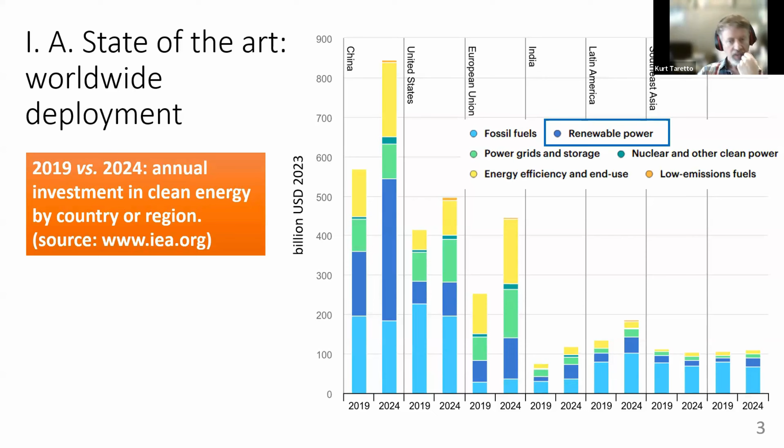So to begin with, this is the outline of my talk. First, I will talk about the deployment of solar energy, the state of the art in the world, and particularly in Argentina, where I will show you also, very briefly, the regulatory framework that led Argentina to slowly grow in photovoltaics technology, and then try to identify a couple of barriers I elaborated with a couple of colleagues quite recently. Barriers to further development, I mean.

In the second part of my talk, I will talk about recycling, the recycling of traditional modules. More than 95% of photovoltaic modules are called traditional because it's the silicon technology, and this is what I will be talking about: what is the state of the art worldwide about recycling, how can we forecast the demand for recycling modules, and how can we apply this forecasting model to Argentina. Finally, I will give a technology overview about recycling possibilities.

So, yeah, let's start.

The solar deployment around the world - I'm sure you have seen enough graphics about the growth of renewable energy along the years. This is a different way to look at it: a comparison between the year 2019 and 2024 of the investments done on renewable energy. Renewable power is marked here in blue. These are the different countries or regions, and you see that between 5 years ago and now, more or less all of them increased notably the investment in renewable energy, of course including solar. But is this enough?

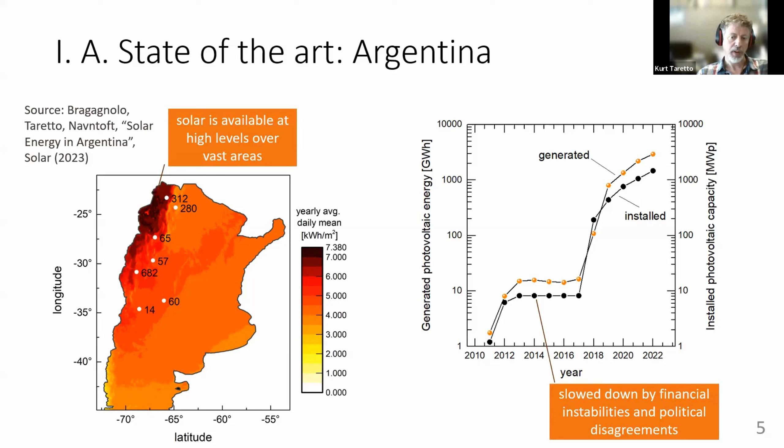Well, Argentina is a very sunny country, I guess you know that. This is a map of solar energy - the yearly mean value of solar energy per square meter. You can see we have regions with very high solar energy. In particular, this point here is the point in the world with the highest solar energy along a year. You may think about the Sahara, but the Sahara is not as high as this, where you have 4,000 meters above sea level.

For comparison, the solar energy levels are, for example, in southern Germany, which is sunnier than the north, around 3 and 4. So Germany is below the half part of the scale. But we have a lot of solar energy. Of course, the first installations of solar plants are done in these areas where you have the highest radiation levels.

But this is very recent - the installations began in 2010. Here on the right we have the installed photovoltaic capacity in megawatt peak. We just surpassed 1 gigawatt peak. The generation goes hand in hand with what you install, of course. But you see that this is a very particular development curve, right? So we have a lot of solar energy available over very vast areas, but we have issues that made us slow down the installation.

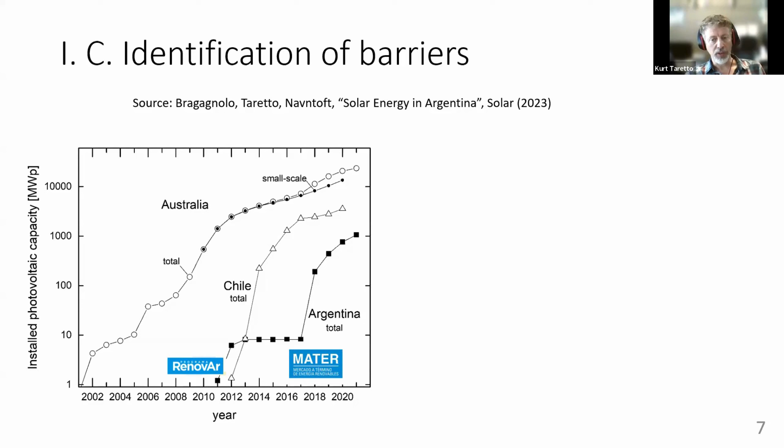Let me give a brief introduction about the regulatory framework which constrains this evolution. There are public policies in Argentina - regulation laws and promotion programs which have different targets. For example, this is a program to facilitate renewable energy to rural areas. This is a program to facilitate the proliferation of renewables for large users like industries, or this other program promoted the installation of larger solar plants, for example via tax reductions or custom duties reductions.

In this recent publication, we tried to figure out what was going on with Argentina and compared it with Australia and Chile. They have similarities - similar solar resources, these three countries. Australia has a higher per capita income than Chile and Argentina. And nevertheless, Chile reached the gigawatt peak capacity a couple of years after Australia, like 5 years. And we took another 5 years to reach the levels of Chile.

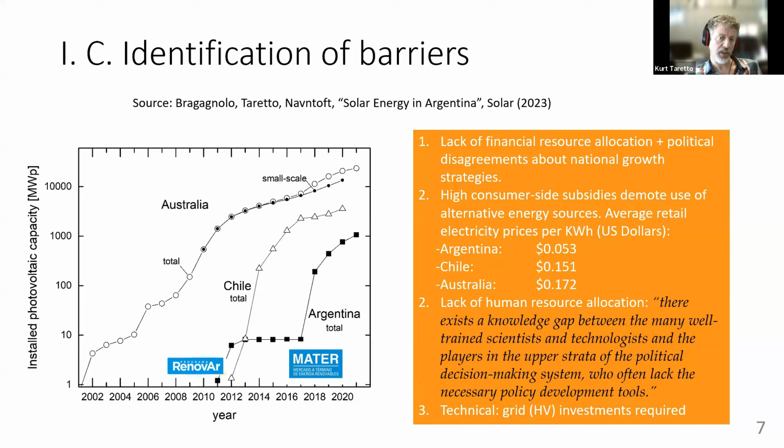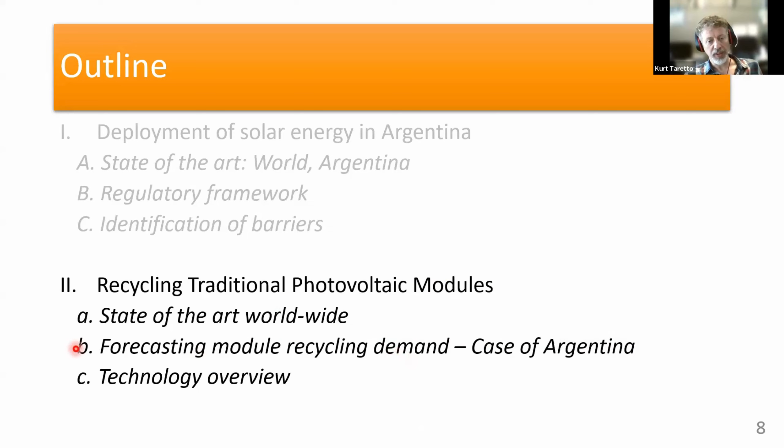So we had different slowdowns. The part where we have seen an increase in solar energy installation had to do with these programs I mentioned here and here, but different barriers slow down the installation in different opportunities. For example, we identified here the lack of the allocation of these financial resources. Also political disagreements between different political contenders, high consumer side subsidies, which demote the use of other energy sources, also in particular renewable.

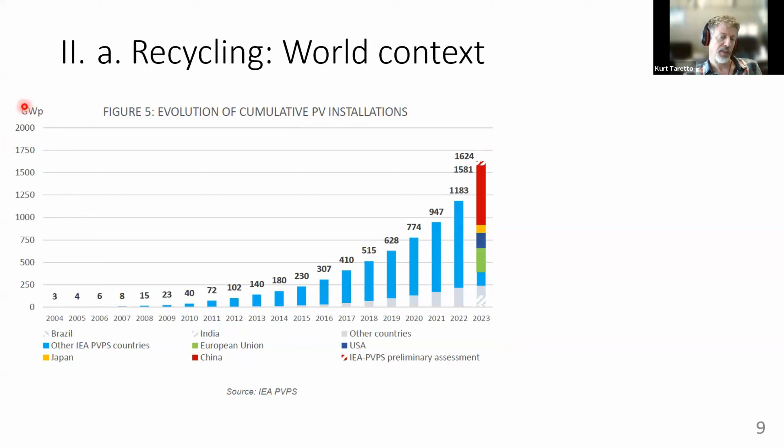And this can be seen, for example, if you take the average retail electricity prices per kilowatt hour in terms of dollars here, Argentina is about 1/3. If you look at the numbers, 1/3 compared to Chile and Australia. Also, as we stated in this paper, I just quote this, there exists a knowledge gap between the many well-trained scientists and technologists and the player in the upper strata of the political decision-making system, who often lack the necessary policy development tools.

And finally, we also have a technical barrier, which is we require investments in the high voltage grid in order to drive all this renewable energy located at different parts of the country towards the bigger centers of consumption. But anyway, with all these installations, we see that the numbers are growing not only here, but also in several different countries. And this raises the question about recycling, of course.

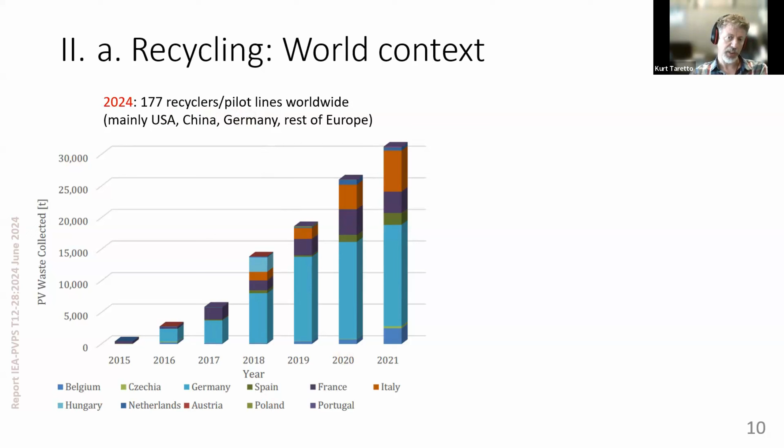So let me give you first a state of the art around the world, what is being done with recycling. First, let us just estimate how much there is to recycle out there. This is a graph which you must have seen in different ways. This is the time in years and the cumulative installation of photovoltaics, but there are similar graphs, for example, for wind energy. So for photovoltaics, this is 2023. It's expected by the end of this year to reach the 2 terawatt mark.

So how much is that in terms of recycling? If we have 2 terawatt of modules, which are just now starting to fail massively, because the timescale here is up to 2024, we have 20 years since photovoltaics installation has become massive. So just now we have a very large volume of modules to be recycled. So we can say for 2 terawatts, if each module is 500 watts, we have 4 billion modules to be recycled. So if the lifetime is 30 years, this means a mean amount per year to recycle of 3.3 million tons per year of panels, right?

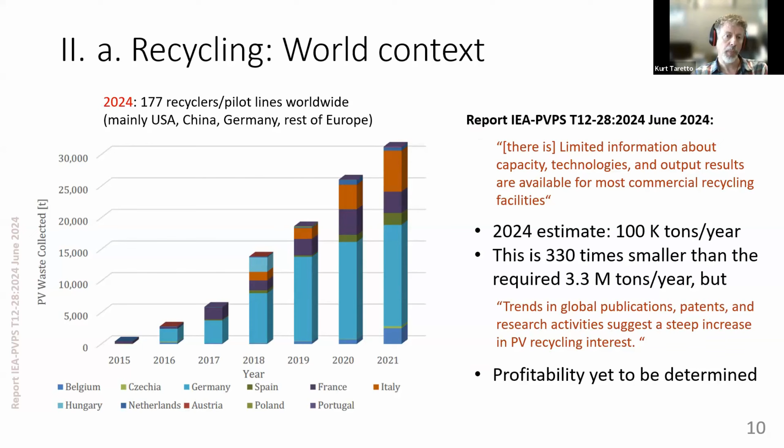Is this a lot? Is this not a lot? We can compare it, for example, with the plastic waste. Plastic waste worldwide is 220 million tons per year. Okay, so this is a figure to bear in mind. Is there any significant recycling around the world? We need 3.3 million tons a year.

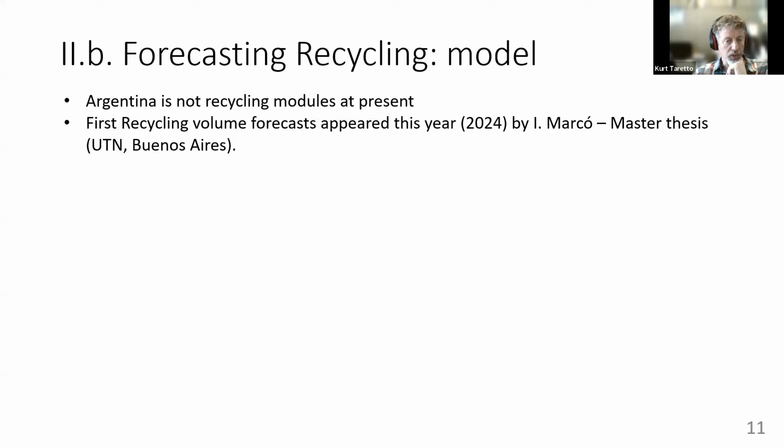Well, this is the evolution of just the amount of PV waste, photovoltaics waste collected in tons. So we have several companies now. In 2024, there are 177 recyclers or pilot lines. And in total, in 2021, this was 30,000 tons of collected material. Perhaps it's 100,000 tons, much less than what we need. We need this 3.3 million tons.

In this report by the International Energy Agency, they say that although they have this, there is limited information about what is the real capacity of all these plants to process PV waste. Also, what is the output? So it's not clear which of these projects are profitable, for example. So it's unclear how much and how efficiently the recycling is going on. It's very recent.

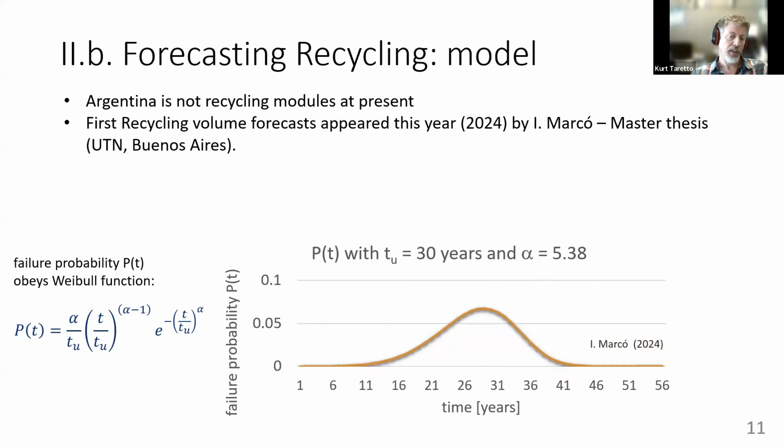Nevertheless, they say that if you see the trends in global publications, patents about recycling and research activities, this will still be growing for several years. The profitability of these projects is not known. It's yet to be determined, and it will depend on several factors, countries, techniques, not clear as of now, according to this report. Which, by the way, if you're interested in this topic, I recommend you to look for it. It's free to download.

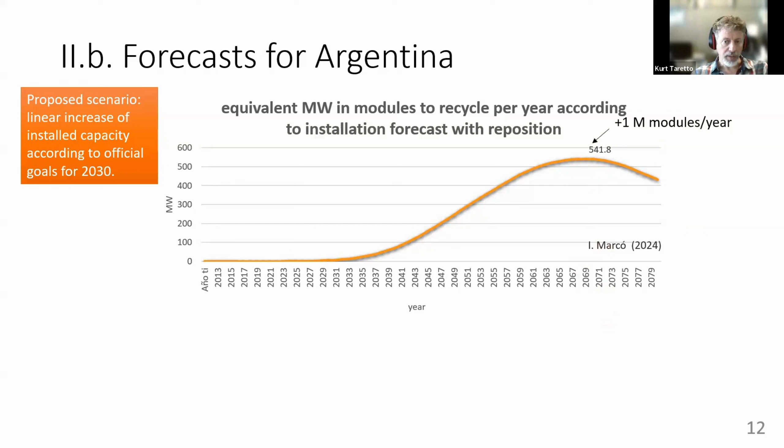Let us try a very brief look at how you model the forecast for the recycling demand, in general, but also in Argentina. This student of mine made her master thesis about recycling modules in Argentina, and Argentina is not recycling modules as of now. So how do you do this? Well, there is this Weibull function which gives you the failure probability. This function is well known in many technology aspects. For example, industry parts or devices tend to fail according to this distribution.

For example, if 30 years is the lifetime, well, this is the probability function for a 30-year projected lifetime of a module. And the spread of this bell-shaped curve has a geometric factor, which was determined empirically by different studies. So this is a number which gives you how much the function is spread. So you can see that although the lifetime is 30 years, maybe at year 10 you have a couple of failures, right?

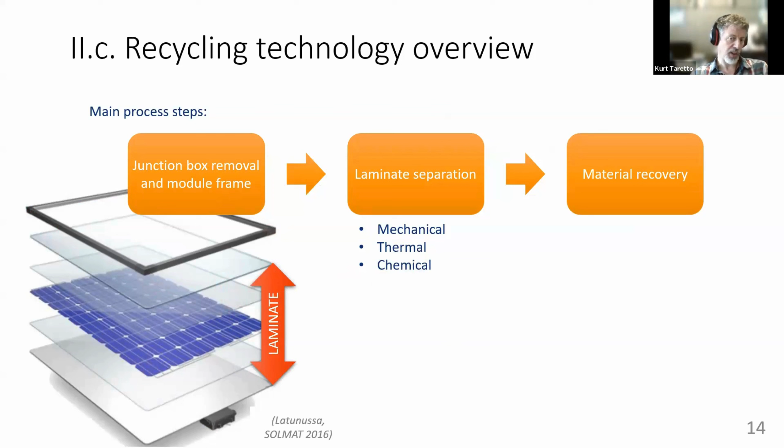And if you fold this probability with the amount of installation for a given country, for example Argentina, you will have a curve that shows you how much you have to recycle every year. So this is what Ines calculated. For the forecasts of installations in Argentina, you get a forecast for recycling with a peak in the year 70 of the equivalent of 500 megawatts in modules. This implies, for example, 25,000 tons of material to be recycled. Also, you can repair modules. This is not taken into account here.

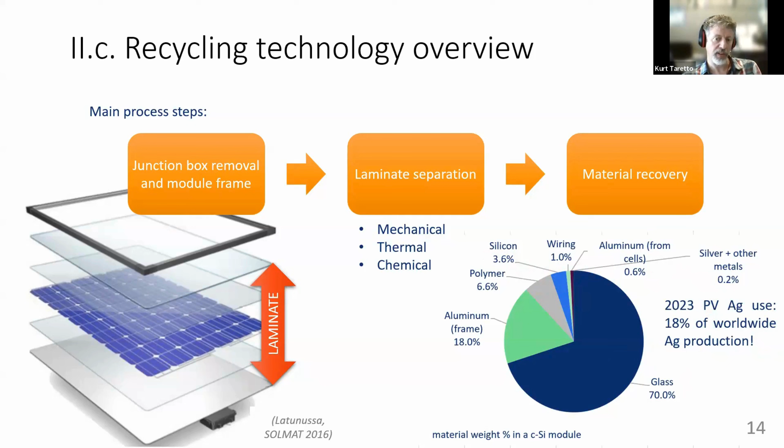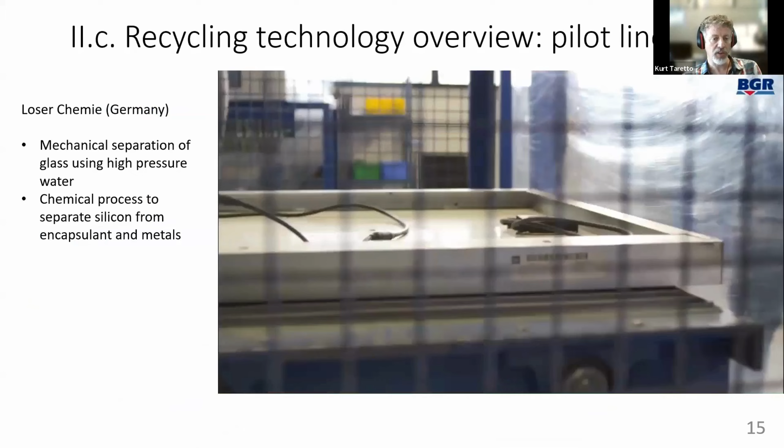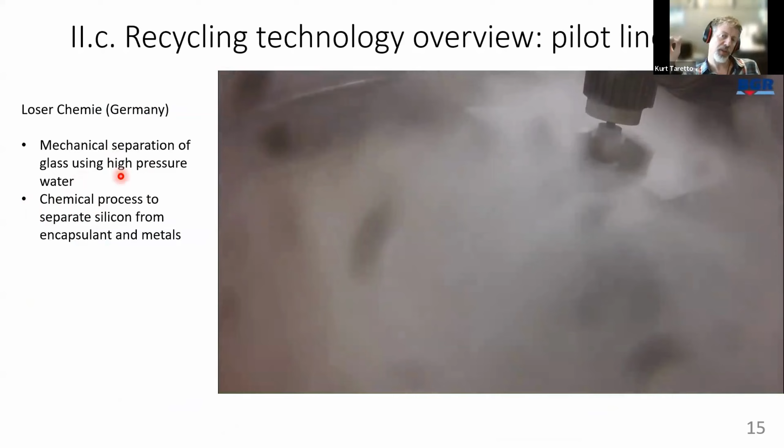A very brief overview before reaching the end of my talk: what is there to recycle in a solar panel? It's a really simple device, actually. You have solar cells made of silicon. There are soldering strips, metals like copper, tin, lead for the soldering. The cells are glued together with some polymers to the glass, which is in the front. And we have an aluminum frame and a junction box, which is plastic, in the back.

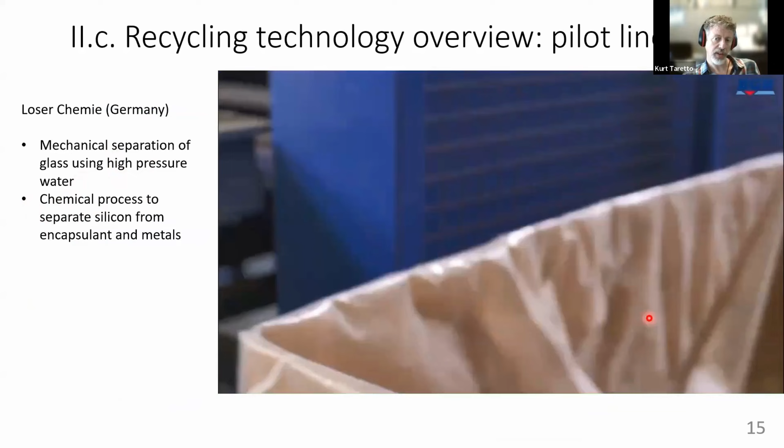So the process steps for recycling are first to remove the frame and the junction box, and then you have what we call the laminate, which is all these sheets glued together with the cells. And there are a number of ways to separate them: mechanical, thermal, where you put everything in an oven, or chemical, of course. And then you can start thinking about recovering the material.

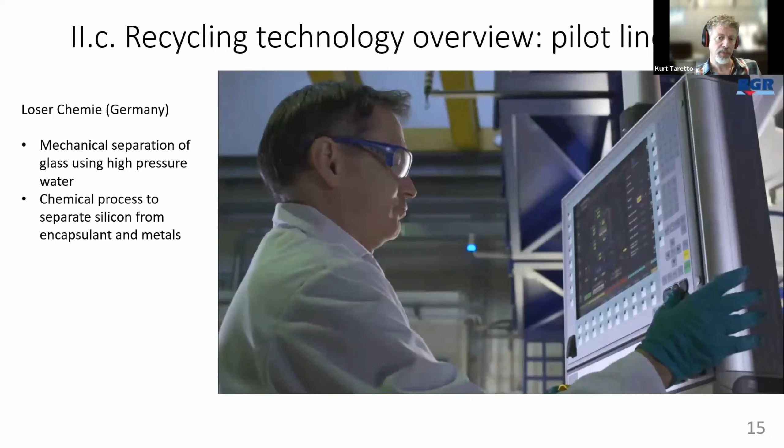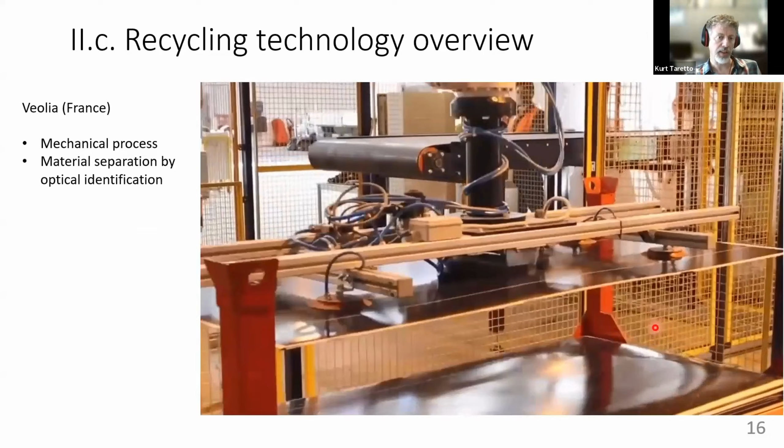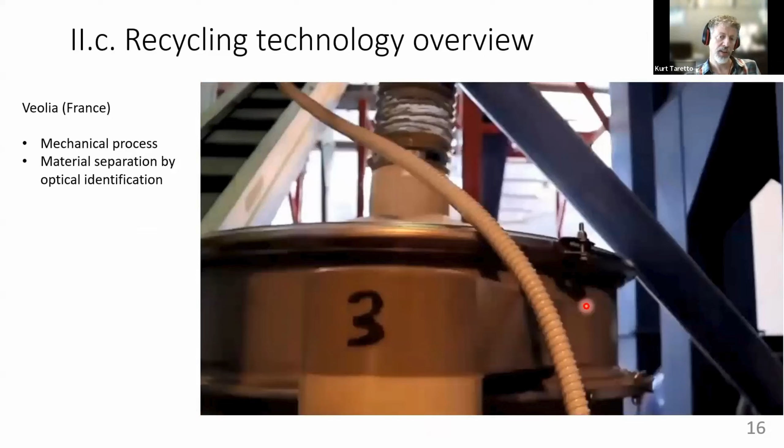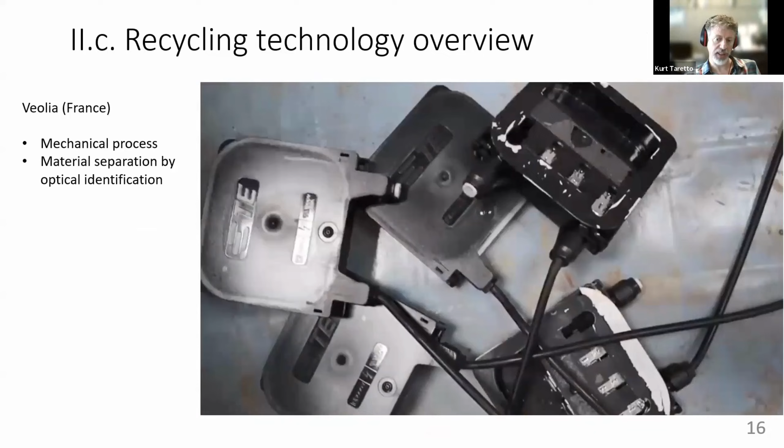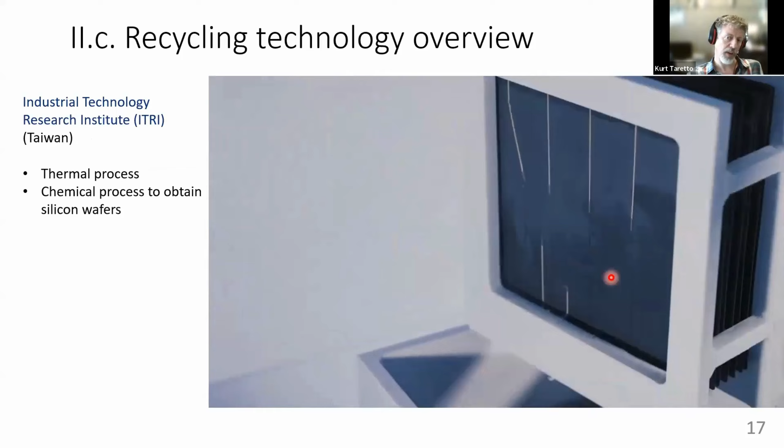These are some examples of recycling facilities. This is in Germany, Loser Chemie. They mechanically separate the glass using high pressure water. So this is a mechanical process; they separate the laminate from the glass, and they get perfect sheets of glass to be reused. That's the glass sheet, now without the cells and everything. On the other hand, they have a mix of the silicon and the plastics, which they then separate chemically. They put everything in a big recipient and separate the different materials using different processes.

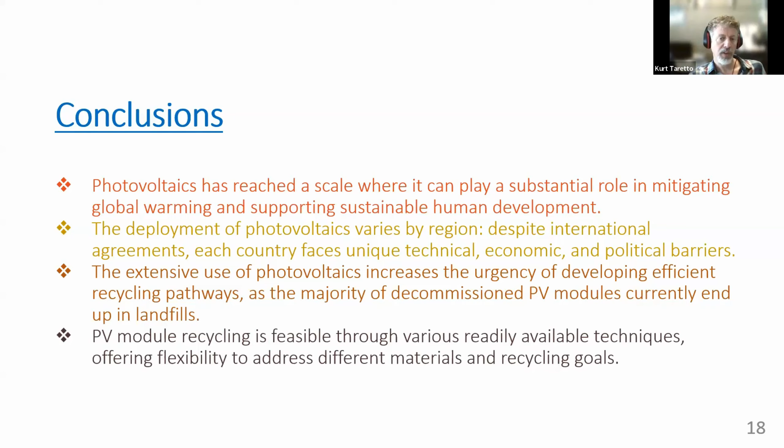Also, this is another company in France. Let me go back a little bit. They separate the frame, the junction boxes, which are plastics to be recovered, and then the glass and the silicon. It's not shown very clearly, but they crush the panels, and then crush them again into a smaller scale until you can separate by different mechanical methods. You can separate the silicon from the plastics and the glass. So here they get almost pure glass and silicon on the other side.

Finally, this is another approach applied in Taiwan, which is to put the modules in an oven and then separate the cells individually, very neat. They can apply different chemical processes and obtain the silicon wafers, which they can reuse to make new panels. And this is actually working, as they claim. This was a very brief overview of the variety you have in recycling solar panels.

So these are my conclusions to this brief talk. We noticed that photovoltaics has reached a large scale. It can play a substantial role in mitigating global warming and supporting sustainable human development. Now, the deployment of photovoltaics depends on the region or country. Despite international agreements like Paris, each country faces unique technical, economic, and political barriers. I showed you a couple of these for Argentina.

The extensive use of photovoltaics increases the urgency of developing efficient recycling pathways, because the majority of decommissioned modules go right now into landfills, okay? And finally, the good news is that module recycling is feasible through a variety of techniques which we already know. So there is some flexibility for different pathways according to different recycling goals.

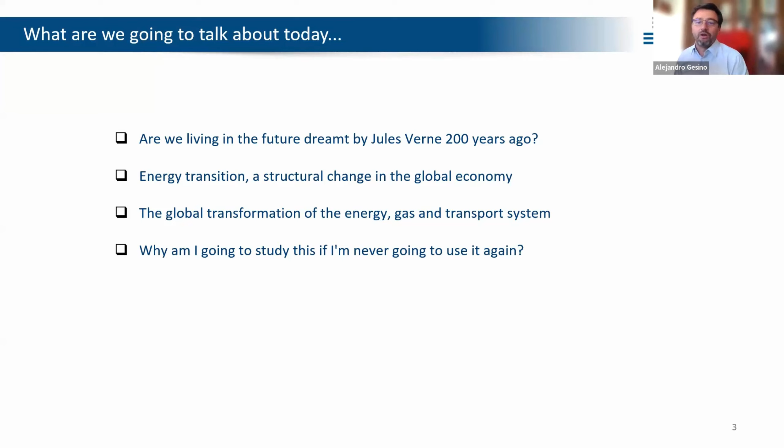We are talking about sustainable human development, and we are not talking about the consumption of products which are being extinguished due to human action. We are now saying that if we consume what we already know we have, human life will change radically as we know it.

Let me say why we are talking about this today. Let me ask you a few questions. First of all, are we living in a future which has been dreamed by Jules Verne 200 years ago? The energy transition requires structural changes in the global economy. And finally, the global transformation is not only energy. When we talk about energy transition, we are talking about three streams of work: energy, gas, and transport. And we will go through this during this presentation.

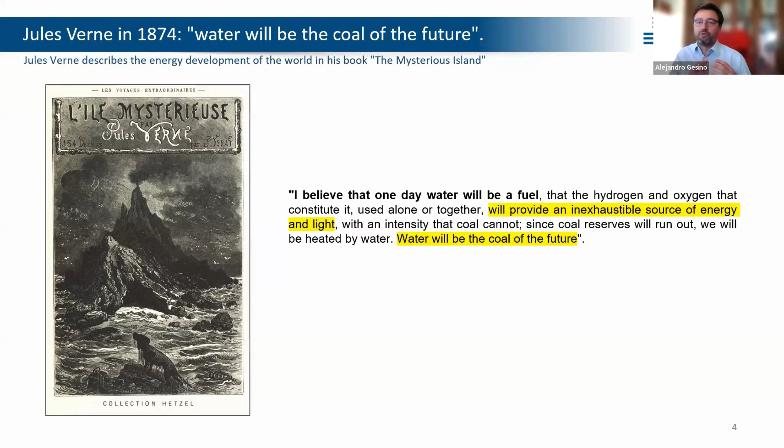And some questions for the students. A question we asked ourselves many times, 20, 30, 40 years ago: why am I going to study this subject if I am not going to use it anymore? So people loving books said, I don't want math. People loving math said, I don't need to read a story and make a summary for my teacher.

Let me go through this at the end of this presentation, saying, guys, everything is linked to everything. And in this university environment, it's very important to answer this question always in the same way. 30 years after we asked this question, we are saying, guys, I am working and need to study chemistry, because now I am talking about electrons and now molecules are going to be mixed within the business cases.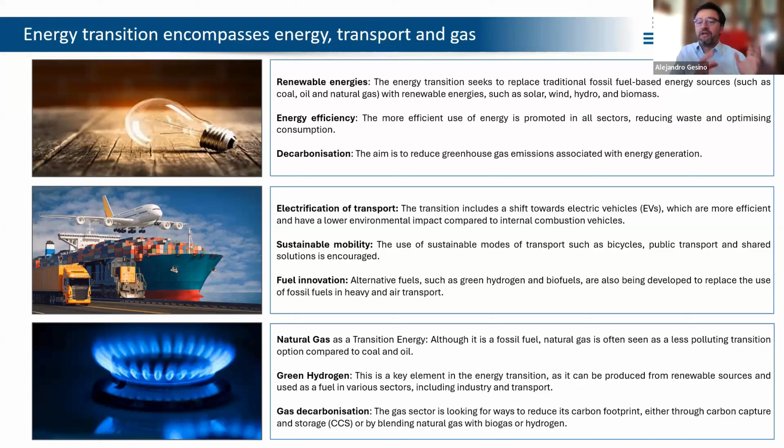Let me start from the end. A well-known author of many books and stories already predicted what we are living. He said: I believe that one day water will be the fuel, that the hydrogen and oxygen that constitute it, used alone or together, will provide a source of energy and light. This was said in a book in 1874. The book was The Mysterious Island, and it has been downloaded many times since we started bringing back Jules Verne's ideas, saying that we will use water as a fuel.

Please remember when he said this. When the trains in the industrial transformation were running on coal, in no way could it be said that water was a fuel by people who at that moment were living because of carbon. I will come back later on, but now we are living things which were said 200 years ago.

The energy transition goes through energy, transport, and gas. I will not go through this in detail because I am sure you have enough knowledge, but it's a reminder.

We are used to knowing that wind turbines, PV panels, like Mr. Taretto mentioned in his presentation. Thanks also, Kurt, for this. I was learning many things from you too. Glad to know you are there. You have many things which were introduced to us by many teachers I had in Germany, for example, during the more than 12 years I was living there.

There we were talking about energy, but they always said, guys, it's not just energy, it's energy, transport, and gas. Wind turbines, PV panels, biomass, hydropower, this is energy. But guys, do not forget, transport and gas are part of the equation. Back to the wind turbines, Hanover Messe, Hamburg Messe, Husum, and so on in Europe. Always our teachers saying, guys, do not forget, transport, gas, and energy. It's not energy only, and now we are living this.

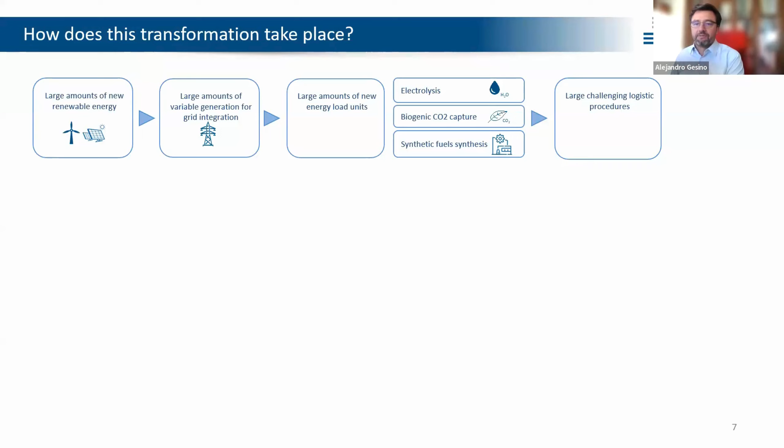synthetic creation of the same molecule. Before I go further, the molecule is the same - please do not think we are talking about a different molecule. We have been talking about electrons and cables, but now we are talking about those electrons powering units which are producing molecules. But the molecule is not changing. Chemistry is not changing. Physics is not changing. We are just using them now.

The other good news is that we are using proven technology. We are not asking ourselves if we can electrolyze water - it's proven, it's there. But now we are bringing this to a new level, to a next generation.

What are we talking about? Please follow this very basic scheme from left to right on your screens. We are talking about large amounts of new renewable energy - please take care of the word 'new'. It's not already installed power. We are talking about thousands of gigawatts which are going to be installed, and are already being installed, to power this chain.

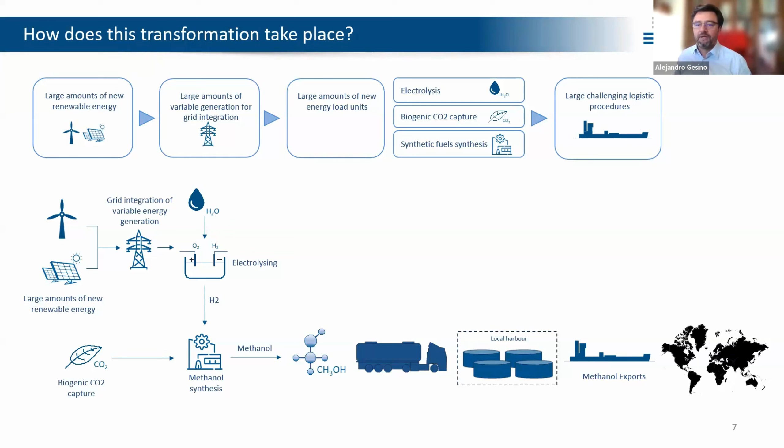Then we need to handle large amounts of new renewable energy in the grids. We have a huge task of grid integration. And now new actors, new friends in our constellation, in this universe - again, I will repeat it until I finish this presentation: energy, transport, and gas, not only energy. And now we have actors which are loading the system.

Electrolyzers, the biogenic carbon capture units, and the synthetic fuels synthesis system for ammonia, for methanol, for whatever. These are large units which are going to be new in the system.

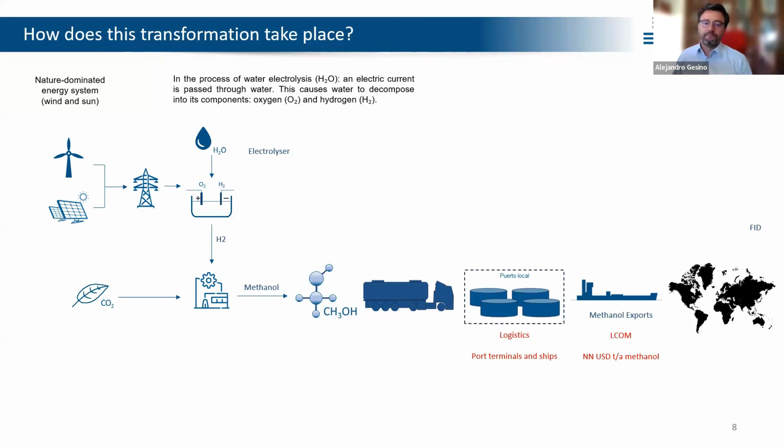And finally, the challenge of logistics, bringing everything to the consumption places. But how is this distributed? If you see it again, left to right: you generate energy, bring those large volumes of energy to the grids, which power the electrolyzers, which power methanol units. In this case, I am using the example of green methanol, where I am also powering the carbon capture, the capture of biogenic carbon, and then producing methanol, transporting it to the local harbor, and then bringing it to the world.

From places where I have unique resources of wind and PV combined, from places where I have biogenic CO2 - ethanol, or paper, cellulose, for example - and bringing them to the consumption.

Places in the world that are looking forward to green fuels, synthetic fuels, where non-fossil CO2 is being consumed. And this is great good news. I will come back to a bit of geopolitics here.

Let me make it a bit more complex, trying to do it quickly as we do in the university. We go from a nature-dominated energy system - wind and sun dominate the systems. 200 years ago it was said that water is going to power our system. Please remember that. In this process, water electrolysis creates hydrogen on one side, oxygen on the other side, and then we use this hydrogen as a fuel.

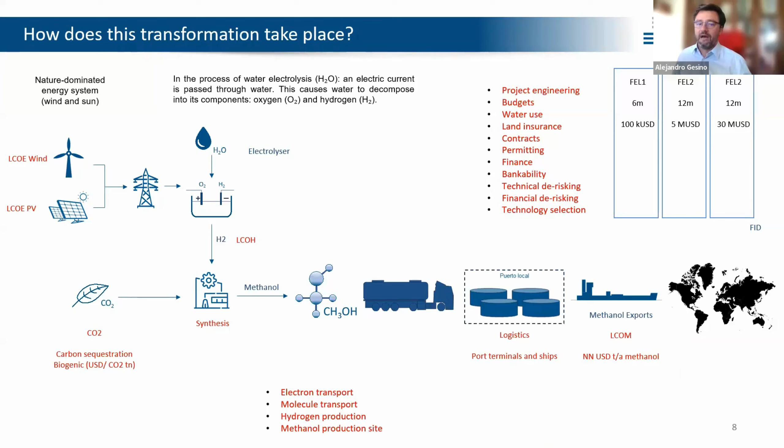Then the synthesis. The typical oil and gas industry we know, creating methanol, creating ammonia, time ago using fossil CO2. But now we need the CO2 to be biogenic, meaning non-fossil CO2, which looks difficult to understand.

And then we have a certain degree of discussions of issues we need to develop, maturing during a certain number of years until we can install these projects. These projects are starting from small-scale projects of 2 to 4 billion euros, up to 20, 40, 45 billion euros. Again, the scale is different.

The engineering behind is different. And we come from a few hundred million euros for a large wind or PV park to billions in a pilot level.

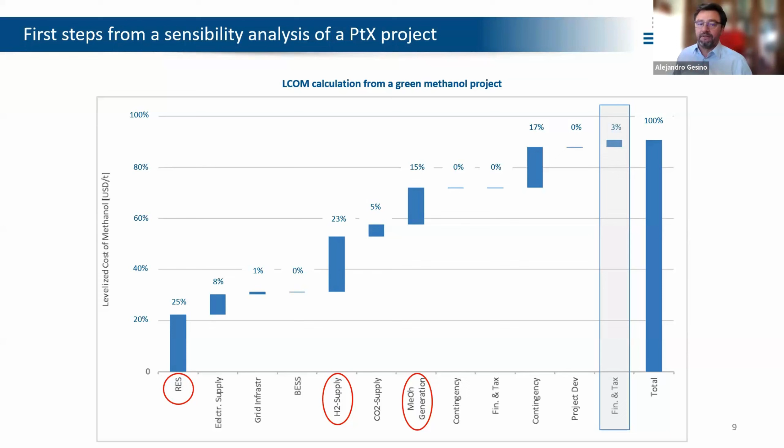And then the discussion here comes about what are we transporting? Again, I will not jump in here because this is a matter for typical lectures for a master's or a PhD, but we are discussing a trade-off between transporting electrons, transporting molecules, transporting hydrogen, transporting methanol until the site of delivery, from the site of delivery, and so on, making the better price, making this affordable, trying to get the levelized cost of methanol.

And compare apples with apples. At the end of the day, I am comparing a ton of methanol. The molecule is the same. The origin is different. The green CO2, the biogenic CO2, is the difference. The green energy, the green hydrogen, is the difference.

And the challenge for us is to make it affordable. And the scale is the discussion. When you have economy of scale, this is affordable. The prices are close to industrial prices nowadays. And then the green industry is taking place nowadays.

Example of what we are doing here when it comes to a project and sensitivity analysis. Again, the final product of this is, and the discussion is, how much it costs. The cost of a ton of methanol.

Can I pay for it? Well, you need to focus on some areas which are more or less relevant in terms of your price. Here you see who is really influencing the cost of methanol when you produce it in the chain I showed before: the renewable energies, the electrolyzer, the synthesis of the green fuel, in this case methanol, and very importantly, the financial costs and taxes, the financial costs of the capital you need to use.

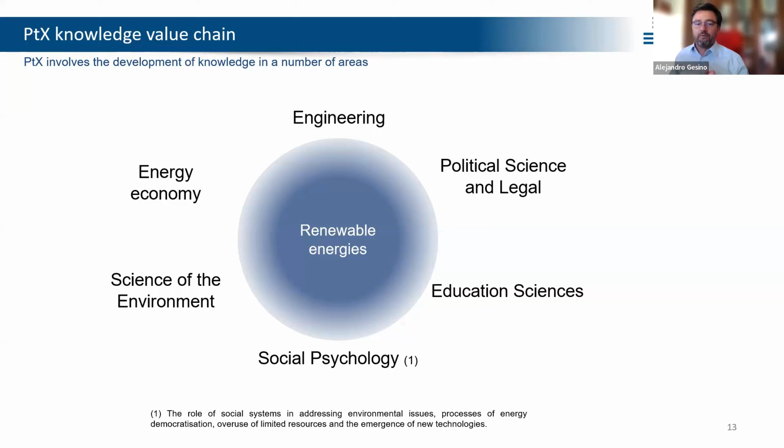Typical areas, South America, the southern part of Africa, are regions believed to be the producers of large amounts of green fuels, synthetic fuels. Exporting to whom? Europe, South Korea, and partially Australia, which has two roles, exporting and also consuming certain kinds of them.

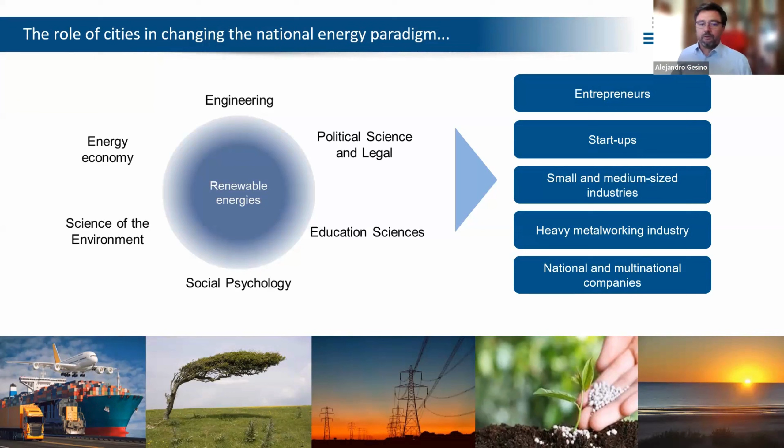It would be hours of discussion if you put on top of this a layer of politics, governments left, center, or right through history. If you look at the development of patents and technology for renewable energy, wind, PV, who are the countries doing that? If you add wars, which are a very sad event we have in the world, these layers would make it much more clear who is triggering the consumption of these technologies and who is delaying them, pushing the world in one direction or the other.

Let me start finishing this with a more university-typical integration of knowledge.

The good news is that engineers are not the only owners of this solution. We engineers are proud of our career, of our title, and we see ourselves as the key part of the world, thinking without us no one could do anything. But guys, welcome to the reality. We have energy economy, political and legal sciences, environmental sciences, social psychology, and education sciences involved. Without all of these actors, there's no way to create the knowledge we need.

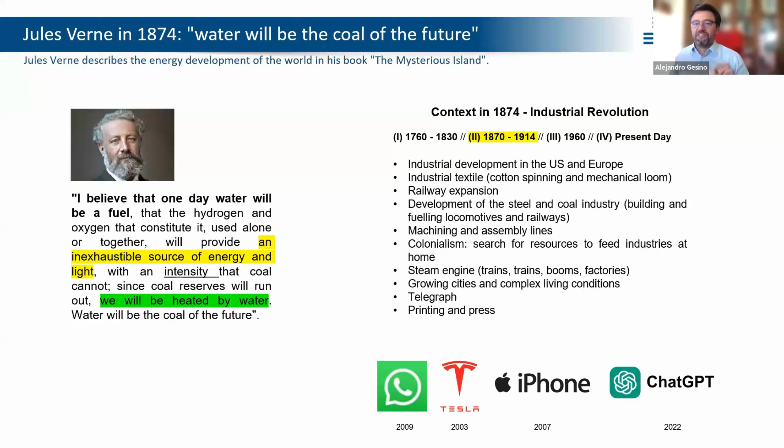I will come back to this. The cities are the small unit of the energy transition. Again, remember: energy, gas, and transport, not only energy, not only wind turbines, not only PV panels. We have everything from entrepreneurs and startups to multinational companies, a broad spectrum of companies who can provide solutions and bricks in the wall of the P2X building.

We have a big building to build. We did the first two big stages, but then we need the fourth, the fifth, all the way to number 50 in the world. And now we are just starting to run, having been working for 40 years.

Let me finish by bringing you to the context of what was said at the beginning of this presentation: an inexhaustible source of energy and light with an intensity that coal cannot match. Please note this, this guy was talking about intensity in the energy source.

And he said it would be heated by water. But when was this? During the second industrial revolution. Please keep this in mind: trains, expansion, development of the steel and coal industry, machining and assembling lines. Colonialism was there. Steam engines for trains, for factories, growing cities, bringing workers to those places. There was no way to see water as a power source at that time. Please bring your mind to that moment.

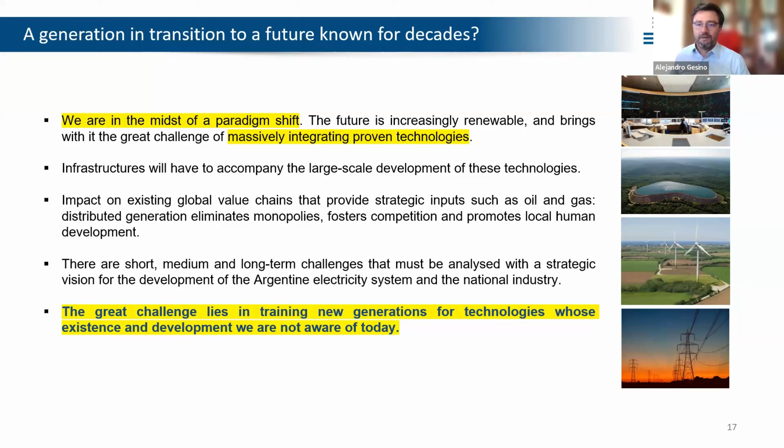We are, from my point of view, a transition generation. If I mention the amount of technologies that I, at 47 years old, have used, starting from a diskette in a PC, MP3 players, and the Spotify world, to energy and cars with internal combustion.

And that's why I would like to finish with one very big statement, which is a challenge for everyone in the university. The challenge lies in training the new generation for technologies whose existence and development we're not aware of today. We don't know what is coming, but I need to prepare your brains to create things which I do not know.

Because it happened to me when I started with 2-blade wind turbines at the University of Stralsund, and a very small H2 unit for electrolyzing. Five years after, someone is talking about 10 gigs of electrolyzing. So I need to prepare people to handle technology which I do not know. It's the difference from the very beginning, from a very easy book to a book which has not been written. This is the challenge.

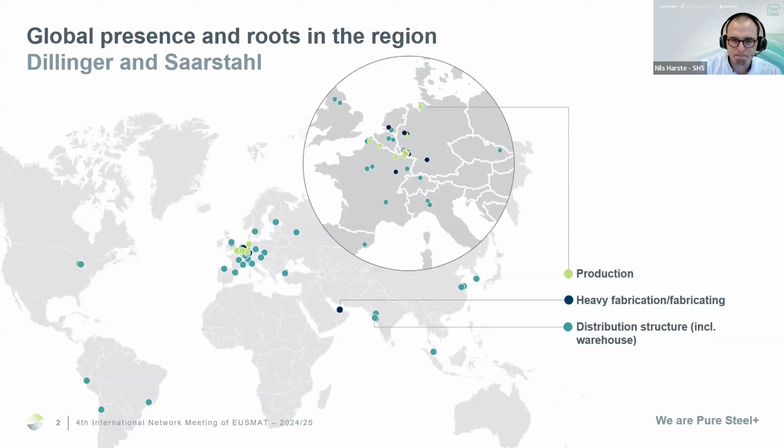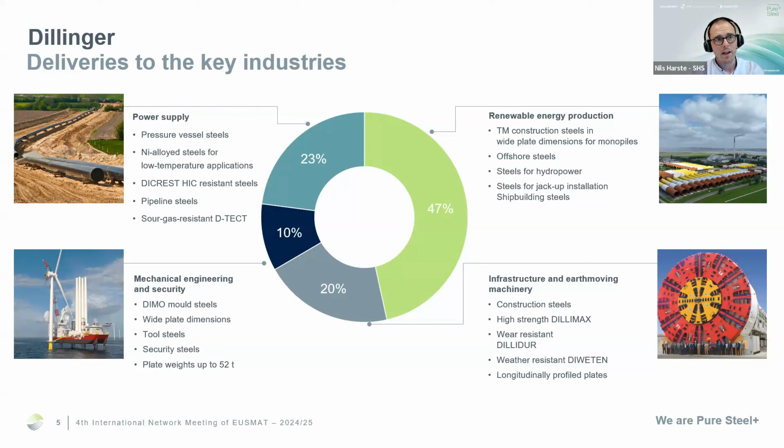Let me give you a brief heads up of who we are. SHS, the Stahl Holding Saar, where I work, is a management holding above the two steel companies, Dillinger and Saarstahl, located here in Saarland. We also have plants in further areas in Germany and in France. Plus, we are a global player, with distribution structures all over the world, for example in North America, South America, Europe, the greater area of Asia and the Middle East. So we have global markets, global competition, and therefore—which will be interesting for the further talk—we also have a topic of global energy prices.

Just a brief summary of how big we are: we have around 6 billion in sales revenue, around 13,000 employees, so we are by far the biggest employer here in the region, and we produce around 4.1 million tons of crude steel.

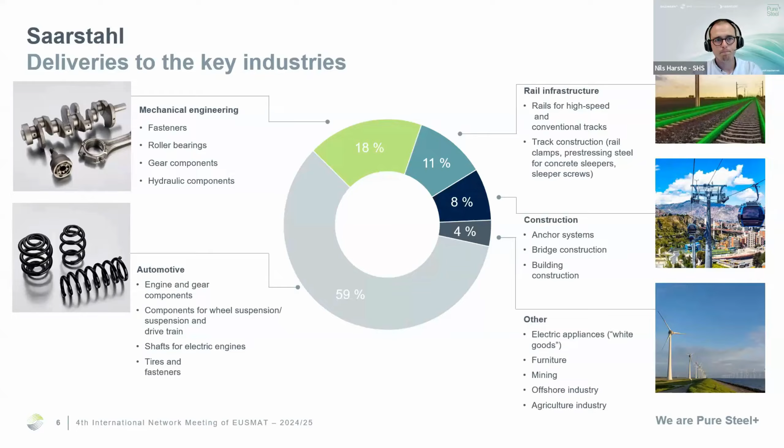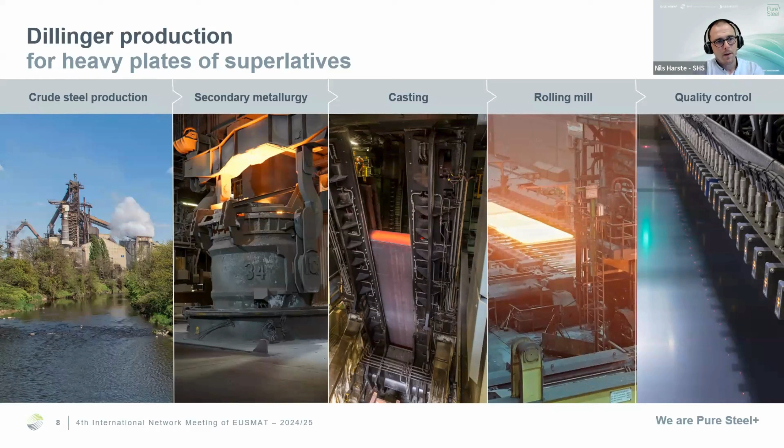So what are our products? You have to understand our products in order to understand the energy transition we are facing. At the Dillingen site, we have one major power supply key industry. It used to be the biggest one - oil and gas, transportation, pipelines. But in recent years, like the past 4 years, that shifted to renewable energy production. When you see an offshore wind farm, everything below sea level is from Dillingen, especially the monopiles, the foundation of each windmill. But we have other key industries, like machinery, heavy machinery, mechanical engineering, bridges, all where we need heavy plates and heavy sheet metal - that's part of the Dillingen site.

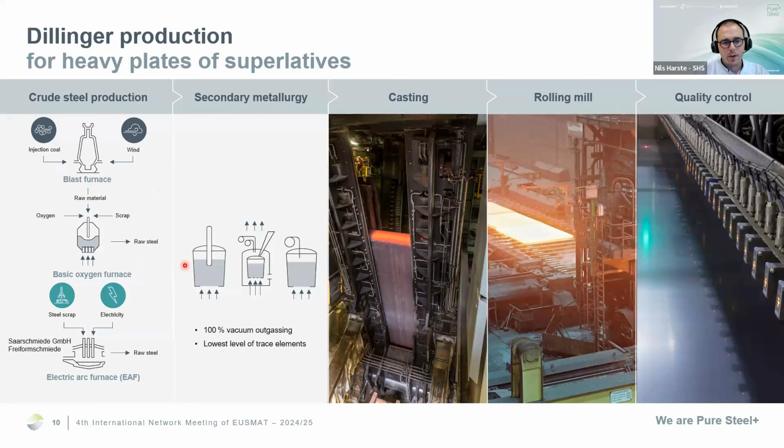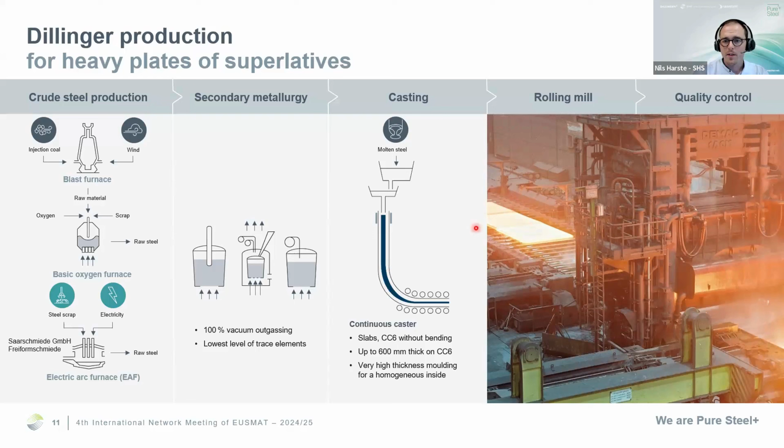Then we have Saar, a totally different market. It's more like the long product market - everything thin and long, for example the automotive industry, springs, or the wire rod in tires, that comes from Saar. Around 60% of the market is the automotive industry, which is a problem at the moment. You only have to open the newspapers to see the German automotive industry is struggling, and that's a problem for us as well. Then we have mechanical engineering, rail infrastructure with our plants in France, and other construction sites.

Now, you have to understand the process of how we produce our products. I don't know whether you've been able to visit a steel company before, but this is a brief walkthrough of the steps we face here at Dillingen and Saar. The first step is pig iron and crude steel production. As of today, by far worldwide, production happens with blast furnaces. After the blast furnace process - I won't go into technical detail - we have the basic oxygen furnace, and after that we have our crude steel. Crude steel is the basic steel for the secondary metallurgy, which comes next.

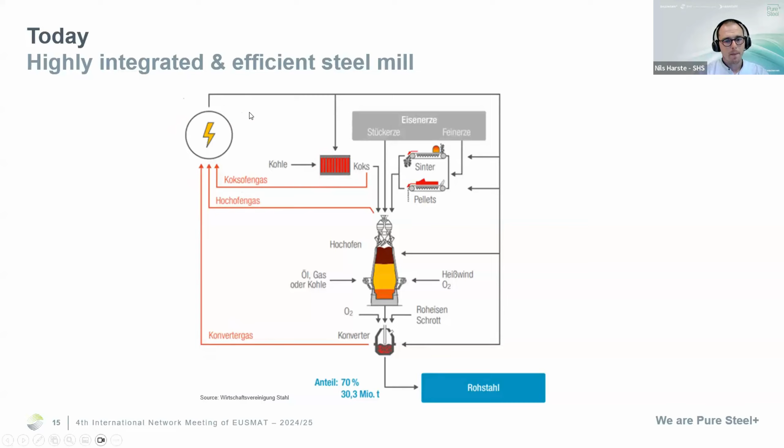We have the secondary metallurgy where we get rid of trace elements. We have the casting process where we solidify the liquid steel - at Dillingen as slabs, so-called slabs - and then we have the rolling mill process where we produce metal sheets out of slabs, and at the end of the day, quality control as well. At Saar, it's basically similar. They get the pig iron from Dillingen. They also have the secondary metallurgy. The casting process is a little different though - we don't have metal sheets, but wire rods, rails, and steel bars.

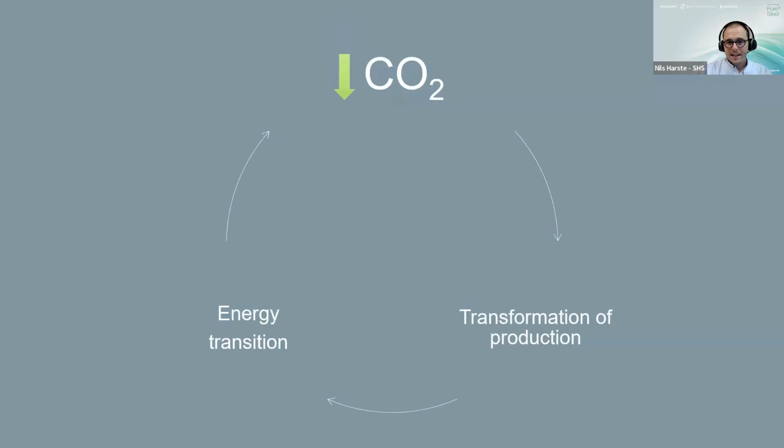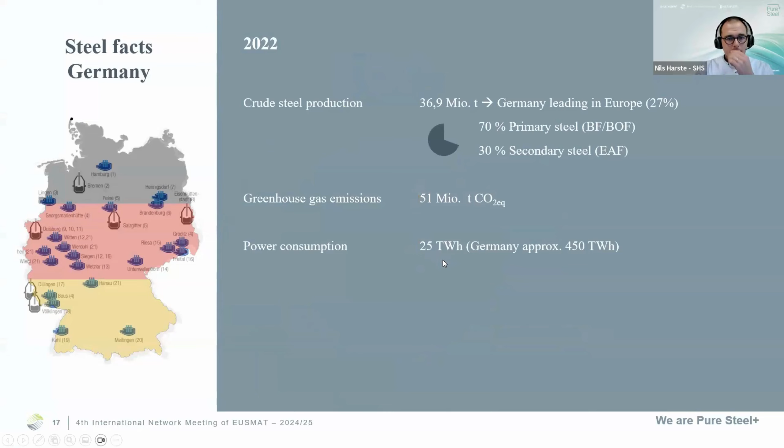But there's one important thing about today's production side: it is a very highly integrated and efficient steel mill. Everything that goes into the process - coal, coke, iron ore - gets transformed into, on one hand, steel, but on the other hand, we have other products: off gases. And those off gases are very valuable to us. As an off gas, for example, in the cokery we have cokery gas. From the blast furnace process, we have blast furnace gas. From the converter process, we have converter gas. And those gases, for example the cokery gas, have over 50% hydrogen, so there's lots of energy saved in those gases. Those gases are reused to, on one hand, fire the ovens, and on the other hand, to produce electricity. So at the Dillingen site, we produce our own electricity and only have to buy a very small portion from the grid.

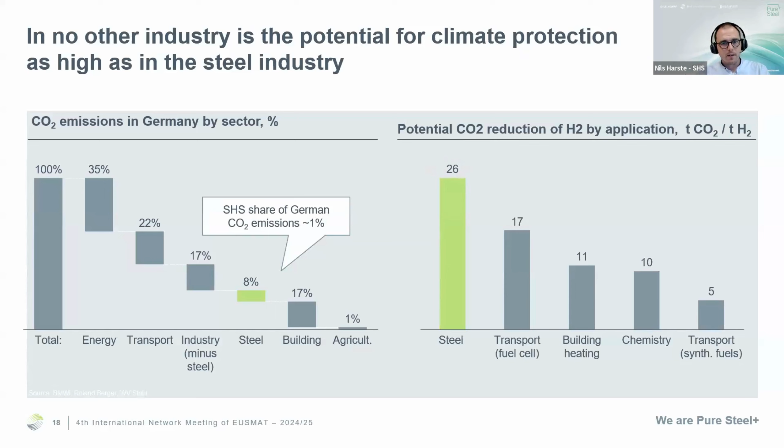Now, with this process, we still have a big problem, and the big problem is CO2. It's a very CO2 intensive industry, the steel industry. The question is, well, CO2 is both an economical and an ecological problem. Economically speaking, we have to buy certificates - for each ton of CO2 we pollute, we have to buy certificates. So it's expensive, and it will become more expensive in the future. And ecologically, well, it's not good for the climate, obviously. So we have to think about a way to produce steel in the future with less CO2 emissions. We have to transform our production, and to do that there is an energy transition - this is what I'm going to talk about in the next slides in order to reduce CO2 emissions. Believe me, this project is disruptive, in a mind-blowing way. It's surgery on an open heart at our sites at the moment.

So to give you some steel facts about Germany: we have a crude steel production of around 37 million tons per year - that was 2022. At the moment, it's decreasing, unfortunately. We have around 50 million tons of CO2 emissions in the steel industry, and our power consumption is around 25 terawatt hours.

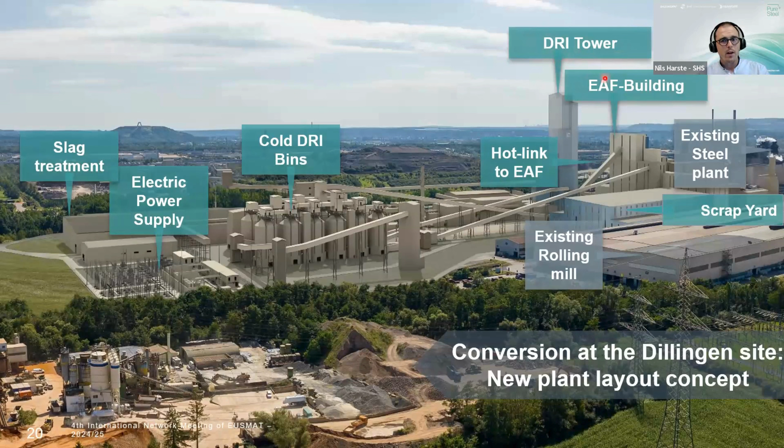Now, what's the portion of CO2 emissions for the steel industry in Germany by sector? 8% of all CO2 emissions in Germany come from the steel industry. So it is a heavy amount. And our portion of that is around 1%.

Now you can ask yourself, which of those would be the best to transform in order to reduce CO2 emissions? And we all talk about hydrogen at the moment. And in terms of hydrogen, the potential of CO2 reduction per ton of hydrogen is by far the largest in the steel industry. So in the steel industry, when you use 1 ton of hydrogen, you can reduce 26

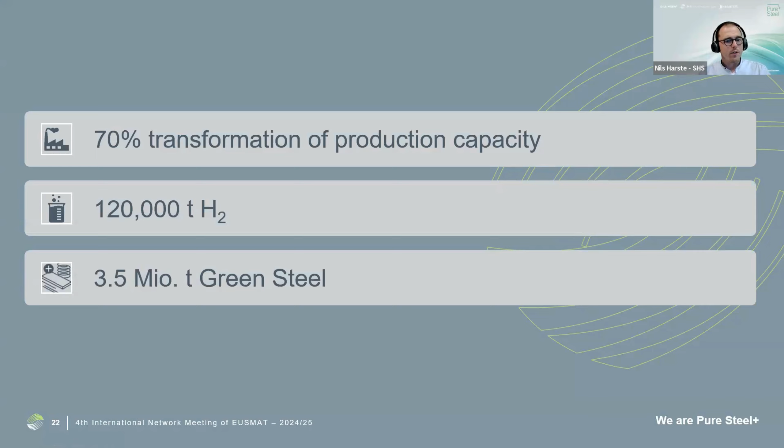tons of CO2 emissions. And that's the reason why it's worth it to put money in the transformation of the steel industry, which the subsidies of the federal government also did in the past. I guess you all heard about it. The steel industry is being funded at the moment here in Germany by billions, but I think that's a good investment because the potential and the leverage is highest here.

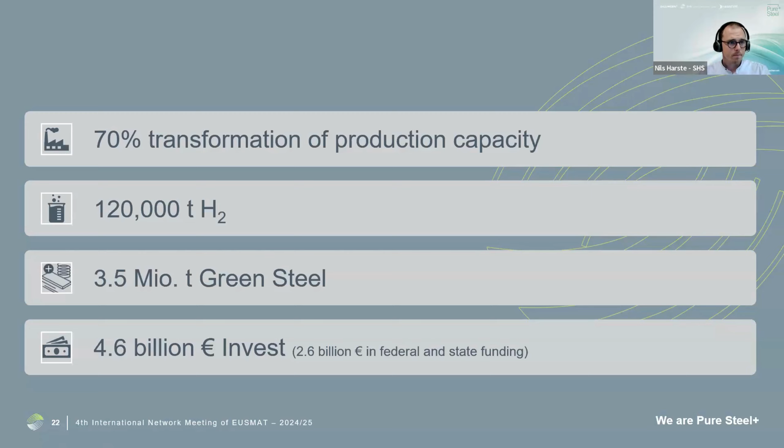So what are we changing at the moment? What is our transformation? The project name is Pure Steel+, and what we do is we transform our whole way of making steel beside the old route. The major parts of the new route are building a DRI tower, that's a direct reduced iron tower, maybe the equivalent of a blast furnace, and an EAF, an electric arc furnace.

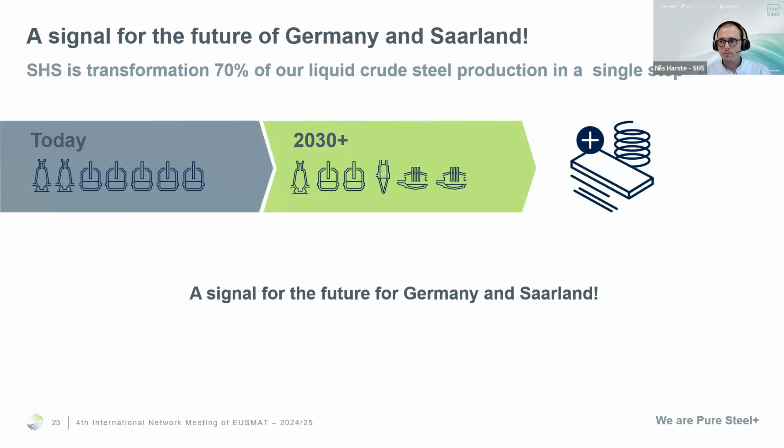At the Dillingen site, we will get such a DRI tower, and we will get 1 electric arc furnace, working parallel to the conventional route. At Saar, about 20 minutes apart, we will not have a DRI plant because the cold DRI, the cold direct reduced iron, will be transported from Dillingen to Völklingen to this site, and they get an additional electric arc furnace as well.

And to give you some numbers about the size of this transformation, we will transform 70% of our production capacity at once. We will use up to 120,000 tons of hydrogen at the final stage. And with this, we produce around 3.5 million tons of green steel. So this is around 70% of our 4.5 million tons of steel we produce today. And all this will cost us around 4.6 billion euros.

Obviously, we cannot do all the 4.6 billion euros by ourselves. So 2.6 billion is a subsidy from federal and state funding. Without that, we couldn't have done this.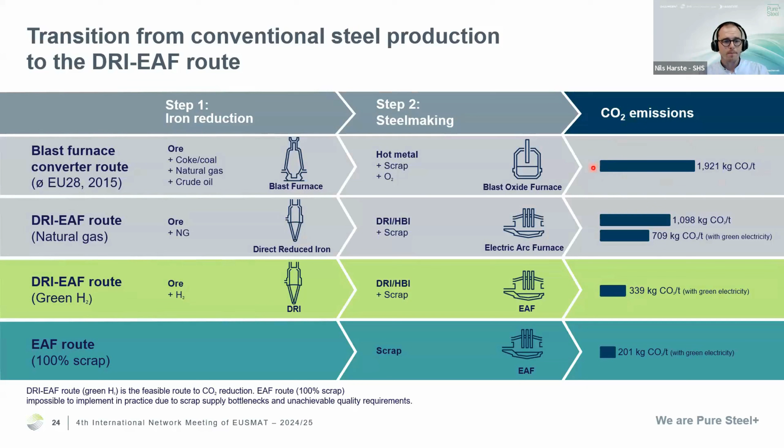So today, we have 2 blast furnaces and we have 5 so-called converters. And tomorrow, we're going to have 1 blast furnace. We're going to have 2 converters. This is the conventional old route. In addition, we will have the direct reduced iron plant and we will have 2 electric arc furnaces.

And this is very important. All the people who live here in Saarland know that for the future of Germany and Saarland, because if you imagine, we have 13,000 direct employees and many more indirect employees. So it's crucial that this project will fly.

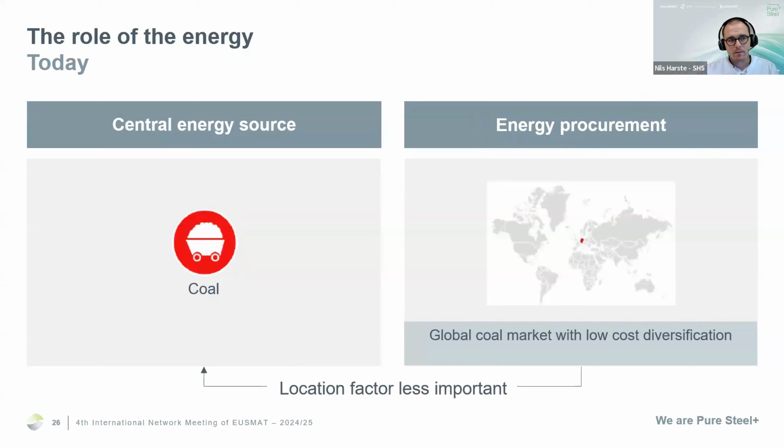So now what does that mean in terms of CO2 emissions? Here in the first row, you see the blast furnace route. We have iron ore, coke, coal, natural gas. And at the end of the day, we have around 2 tons of CO2 per ton of steel. 2 tons CO2 per ton of steel.

In the first step of our transformation, we will use the DRI-EAF route. In the beginning with natural gas, so 100% natural gas, no green hydrogen because it's not available. And even by using 100% natural gas, we will halve the amount of CO2 emissions. So it's only 1,000 kilos or 1 ton CO2 per ton of steel. So that's already a big step.

And in the next step, we will use green hydrogen as a reduction agent to substitute the natural gas. And by this step, we will again reduce the CO2 emissions by a lot. There will always be a significant amount of CO2 emissions left because we need carbon in the steel. So we have to add carbon, but it's way less than from the normal conventional route as of today.

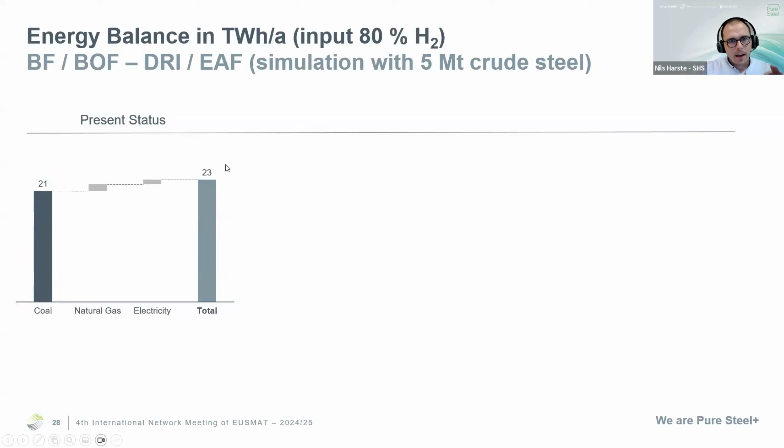So what is the role of energy in this transition? Well, as I mentioned, the central energy source at the moment is by far coal. For the energy procurement of coal, we have a global market with low cost diversification. So it's not that important where you are in the world to produce the steel. It's basically a level playing field. In the future, it's not going to be coal. It's going to be green electricity and green hydrogen.

And the energy procurement of green electricity and green hydrogen is not a global market. We don't get green hydrogen from Australia, sorry. Maybe it's going to be ammonia at the most, but it's not going to be hydrogen. So the significant global price differences for the commodities electricity and hydrogen are crucial. In other terms, the location factor is crucial.

And now we have a small problem in Germany, because in Germany we don't have that much green electricity and we don't have that much green hydrogen. And this is at the moment a problem not yet thought through to the end. Of course, we build up a hydrogen network in the future. We will have hydrogen imports, ammonia imports, but it is very local and European market price-wise instead of a global market. And this can be a problem in the future.

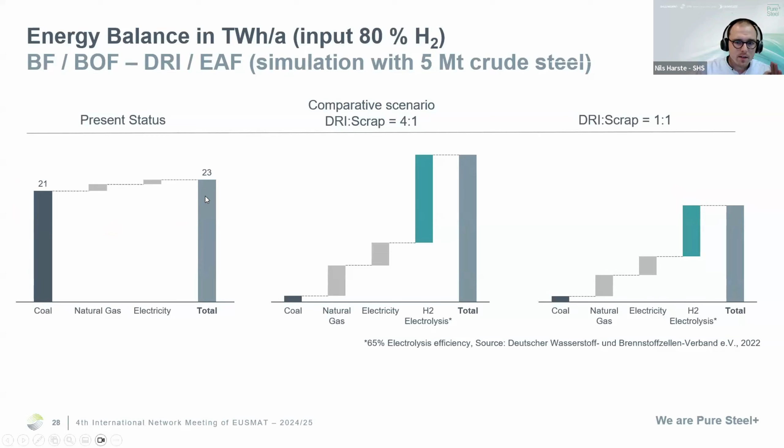So to show you how much energy we have in coal at the moment, you see this chart here. We have around 21 terawatt hours of coal in our energy system here in Saarland. We have around 1 terawatt hour of natural gas and 1 terawatt hour of electricity. So in terms of energy, we have 23 terawatt hours in our system.

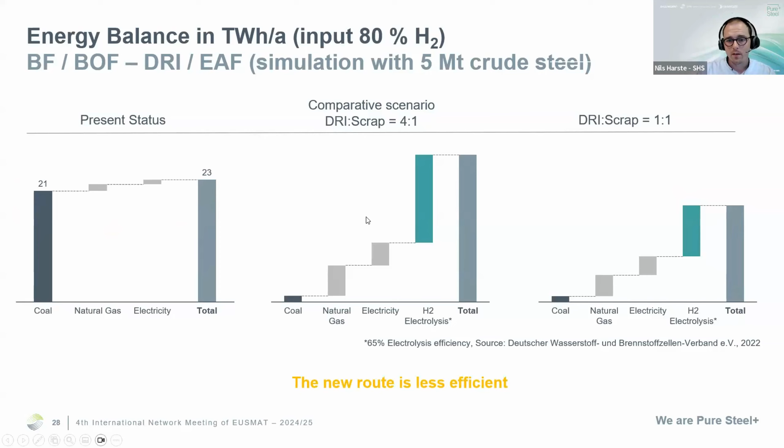Now, when we transform, coal goes down. There's only a little bit of coal left. Natural gas will be increased by a lot, electricity will be increased by a lot, and of course, hydrogen and electrolysis will be increased from nothing to a lot. So as you can see, when you compare those two charts, this route is less efficient. We have more energy in our system than before. And this is a comparative scenario. So if we want to compare the current status with the future, this is the truth.

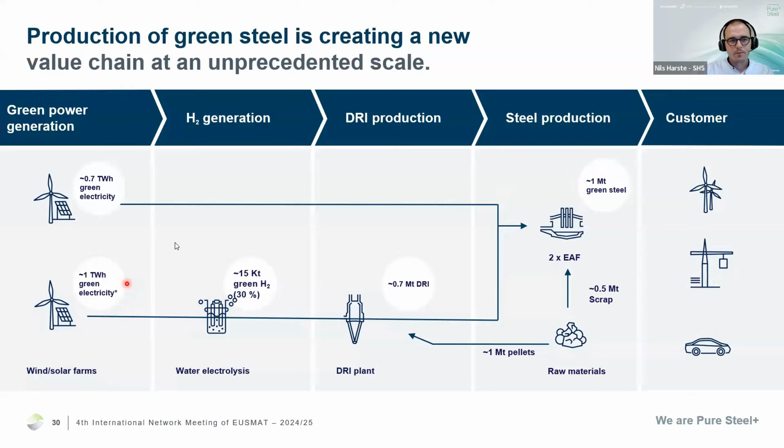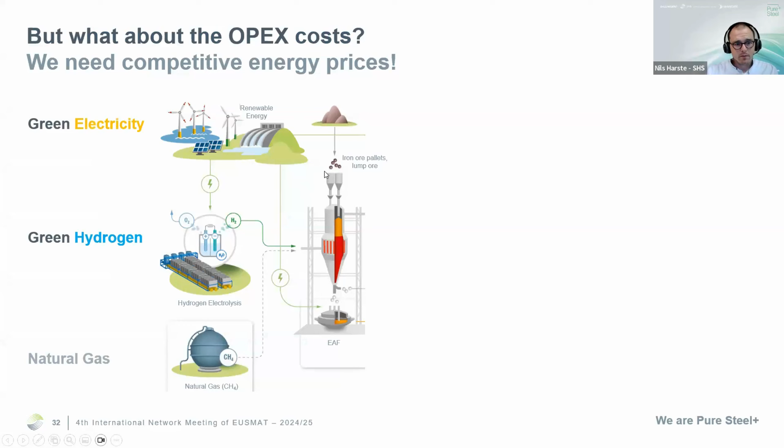Now, we don't produce 5 million tons of green steel. We still have the old route, and we don't use a direct reduced iron to scrap ratio of 4:1. So at the end of the day, it will be similar to today, because we import scrap. We use scrap, and scrap is something we did not need in that amount in the old route. So what I want to say is that the new route is less efficient, and this is something many people forget. We have a highly integrated steel mill at the moment where we use everything. Every exhaust gas is used, all heat is used, and we will be more inefficient in the future. That's maybe a takeaway for this slide.

To give you another example of the energy demand, this is a standardized chart of a production of 1 million tons of green steel. As a reminder, we produce 3.5 in the future, but this is for 1 million tons of green steel. For 1 million tons of green steel, we need 15,000 tons of green hydrogen. This is around 30%, so 70% is still natural gas. And for this, we need 1 terawatt hour of green electricity. To give you an example, the power consumption of our state here, Saarland, is approximately 7 terawatt hours. And we don't produce 1 million tons, we put out 3.5 million tons. So you can imagine our future electricity demand is huge in our area.

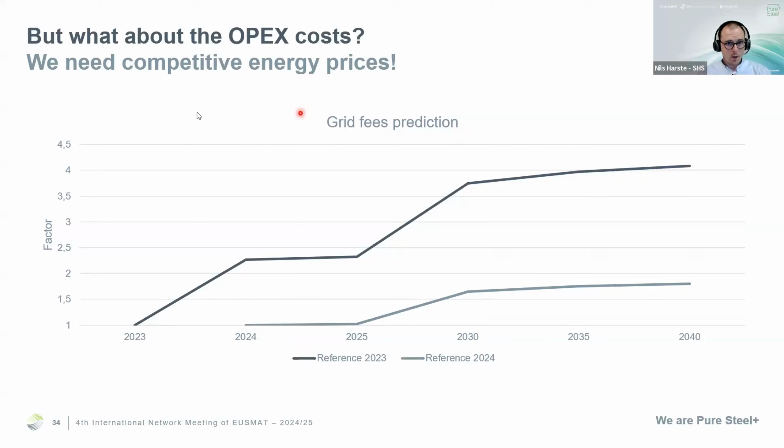Remember, SHS, at the end of the day we need up to 120,000 tons of green hydrogen, and if you do the math, 120,000 times 2.2 euros times 1,000, then you come up with the OPEX hydrogen costs we have, or if you multiply the number with 8 or 15 euros. So that's a significant difference.

Another topic at the moment, maybe you've heard and read about it, are the grid fees for electricity. On the y-axis you see the factor of the price increase, and on the x-axis you see the year. Let's assume 2023 is a reference and is set with a factor of 1. We already saw a doubling in grid fees from 2023 to 2024. We will see a slight increase in 2025, and the prediction, because of the energy transition in Germany, will be up to 4 times of what we saw in 2023.

And already today, the grid fees reach the same region as the energy prices. So, for example, if we have energy prices of 90 euros a megawatt hour for electricity, we have the same amount of grid fees on top. And that's going in a direction where we have problems to face those additional costs.

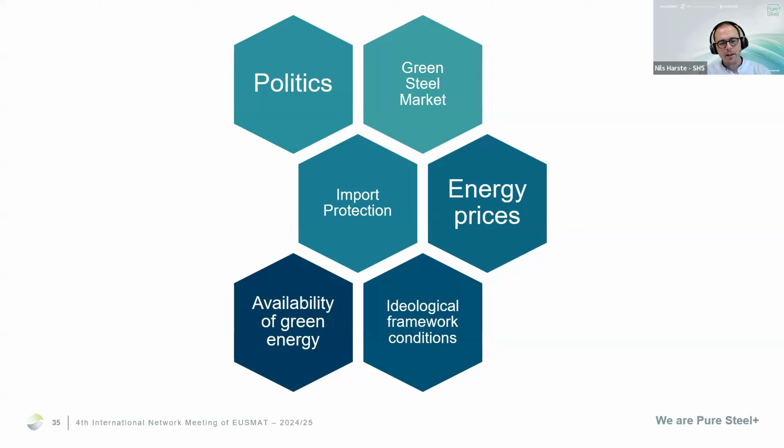Because our customers are not willing to pay that much more for a ton of steel, but our OPEX costs are exploding. So grid fees is a hot topic at the moment, and the government is thinking of having a new system of grid fees. So this is something which we have to work on as well.

So we have tension between many areas at the moment. We have the politics. We have unstable political situations here in Germany at the moment. We have way too much ideological thinking for the market. For example, the start in hydrogen. If I tell you under what conditions hydrogen is green and under which conditions you're allowed to use this green hydrogen, you only have question marks in your head.

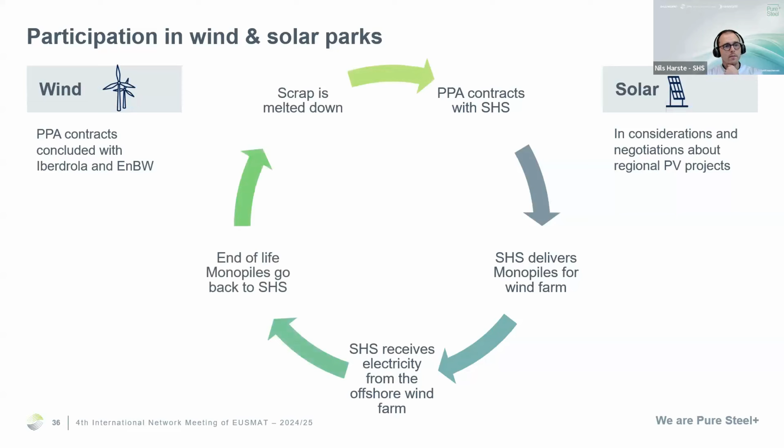It's mind-blowing. Of course, we need an import protection against China, because China is producing steel with subsidies from the state, and way too much steel. The steel gets exported to regions like Europe, the prices are going down, and this is not good for us. We have green steel markets that need to be established. We need a green steel premium. So who is willing to pay more for CO2-free steel, for green steel?

The availability of green energy is mandatory to produce green steel, obviously. Plus, we need energy prices where we can produce in a way that we can compete in the world market. And there's way more points, so there's lots of work to do at the moment. But I don't want to complain too much.

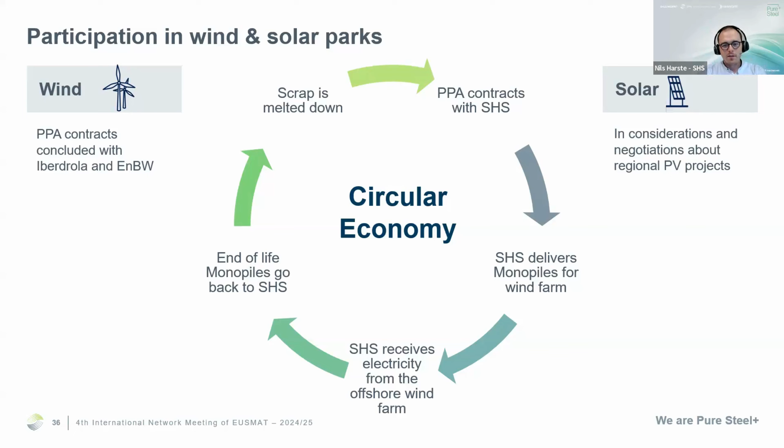At the end, I have a small project which is quite nice. In terms of green energy, we also participate in wind and solar farms. In wind farms, we have so-called PPA, power purchase agreement contracts with Iberdrola and EnBW. And in solar parks, we are currently in negotiations about regional PV projects.

And with one of those PPA contracts with EnBW, we did a project. We have a PPA contract between EnBW and SHS. SHS delivers the monopiles for the wind farm being built at the moment in the North Sea. SHS receives the electricity from the offshore wind farm, and at the end of the life of the monopiles, those monopiles go back to SHS, and the scrap is being remelted. So it's a circular economy project we did with them, and it shows that it works.

You may even have read it in the newspapers, but this is a success story I want to share with you at the end of this presentation. And as you see, there's lots of problems we have to solve in the future, but there's also lots of opportunities. At the end of the day, when we produce green steel and we are one of the first movers, I think there is a good opportunity to earn money with that. But the future will tell.